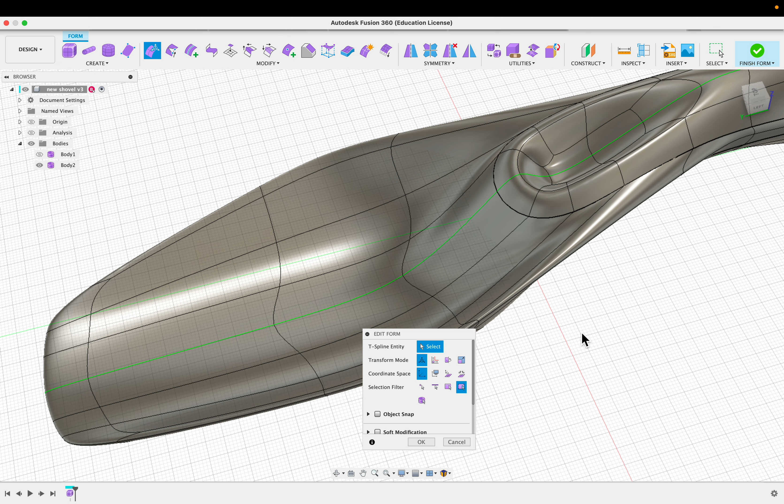We're doing a few more little modifications to our hand tool. So I've got my shovel, and I've done a couple things here. One thing I've found is that this edge, which I've creased, is a good splitting line between the handle and the shovel metal blade.

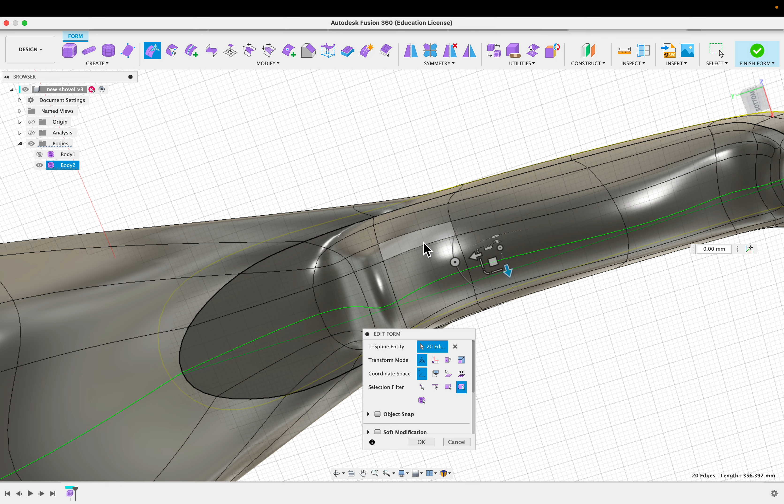And so I've actually built that into my model. I've also taken a couple of the single edges and used the bevel edge tool. I like to use 20%, which gives me two lines close together. It's a little hard to see here, but it gives you a bit of a crease. Let me change this to shaded.

You'll see that if I roll this around, you can kind of see there's a subtle edge here. It's not hard, it'll be good in your hand, but it's just giving a little more design definition. I was thinking about doing that on the top too, but I'm going to continue forward with this, 3D print it, and see if I like it before I bother with that.

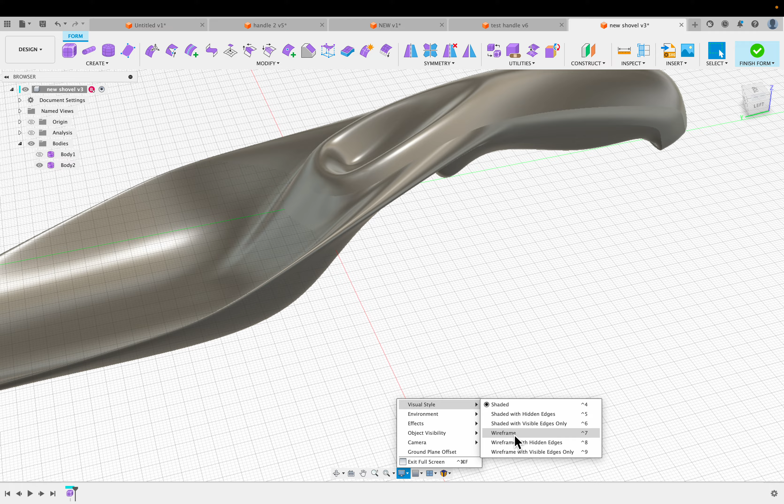So notice here I'm going to my— oops, let's cancel that. Visual style: Shaded will get rid of all those edges so you can kind of see what you have, but you can still edit. I'm going to go back to shaded with visible edges. Sometimes these things help and sometimes they get in the way.

So I've also put on a cross section here so I can make sure that my material thickness is relatively similar. It gets a little thicker towards the back. If I wanted to, now that I know this, I could just pull this edge in a little bit, and I do a lot of these very micro adjustments.

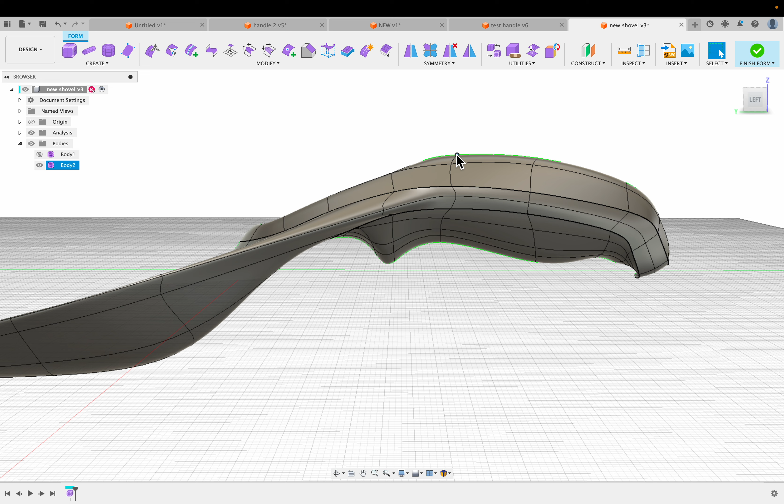I was mentioning I build the basic form in like 10 minutes and then spend hours on the subtlest little tweaks for design. Like here, I wanted this to be relatively straight and then kind of roll off the edge. So let's go to side view here, and you can see I've got a little bit of a curve rolling up. So I might go in here and do the subtlest little tweak. This is like hand sculpting.

Okay, so let's just say this is all good. Let's finish this so you can kind of see what my intention is. Turn off the analysis. And it looks like something weird happened here—let's see, I've got two bodies.

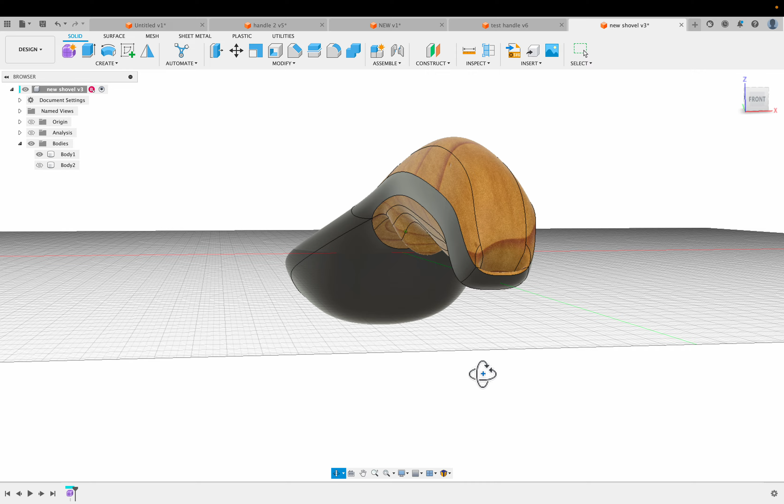There we go. So I've already used the material selection to have the handle and this integral shaft going through the whole handle. My idea is that this top and bottom are two halves that snap together, so you'll be able to have different handles, different materials, etc. I've also cut a little hole in here—this isn't quite right because this would all be metal, but I wanted a little loop so I could hook it onto things or tie a string around it.

So let's look at our materials real quick. Sorry, let's get back in here. I want to brand this, so I chose a kind of— let's look at this here. My idea is this is a recycled aluminum. I can change the— oops, that's the wrong one. It's this one, there we go.

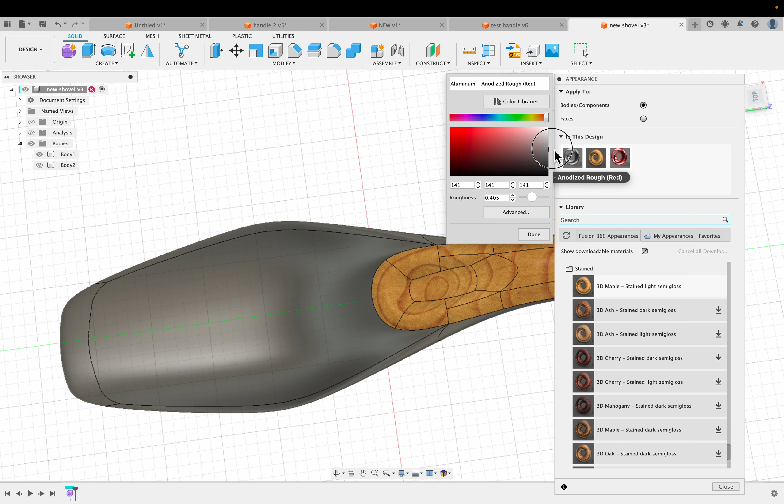I can go in and change the material color and stuff. I think I wanted something that was kind of a real aluminum, maybe just a tad blue. So I just usually bump it out a little bit.

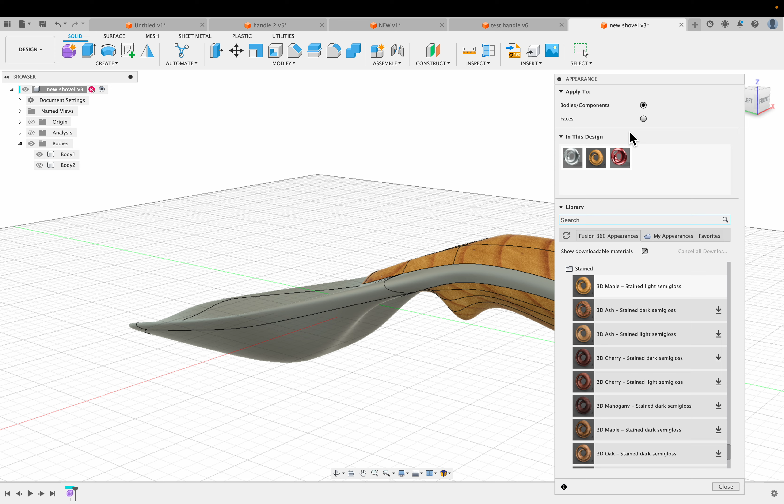Now that I've got this colored, I took the whole object and made it wood, then I colored it with the faces option and used my aluminum because there are fewer panels here. I have to kind of manually—I'll just show you. So when I'm on faces, I can color one panel at a time, whereas when I'm on bodies and components, this thing hasn't actually been split. I'm just doing some rendering, so I'm not bothering to split it yet.

So let's get a different material here. Let's go with a black plastic. Let's close all these—sometimes these get in the way. So I'm going to go plastic, scroll down to opaque and textured. And let's see.

So I've got random polka dots. I'm going to go with random. And now if I try to add this on here, I would end up having to redo all the panels.

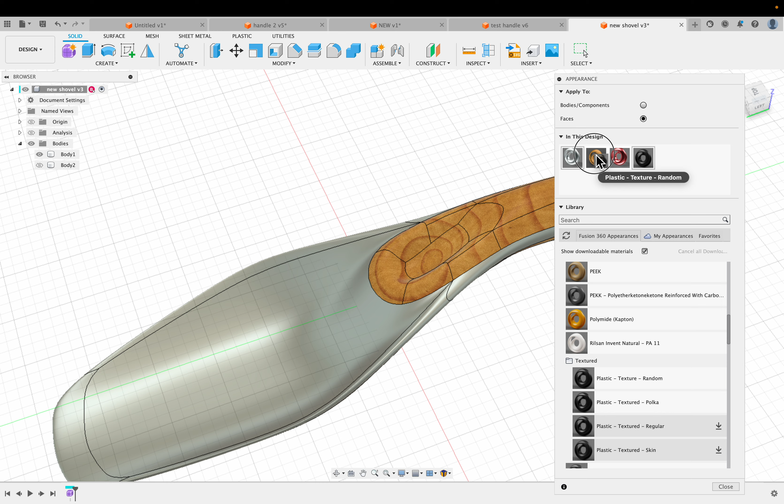So it's actually easier to bring this up into the window here, and then Option or Alt on Windows, drag. I'm holding down Option, dragging this on top of the color I want to change, and I could swap out that color.

Now, I don't know what the deal is, but recently some of these things look terrible in this view. You really have to go to render view, and again it'll look terrible, but when I render it, you'll see. So let's just hit render, and I'm going to do in-canvas render. And all of a sudden now it looks so much better.

I don't know what the story is there, but I'm going to zoom in here just for a minute and see what my random texture looks like. I want it real grippy because I'm working in the garden or whatever. So that might be good.

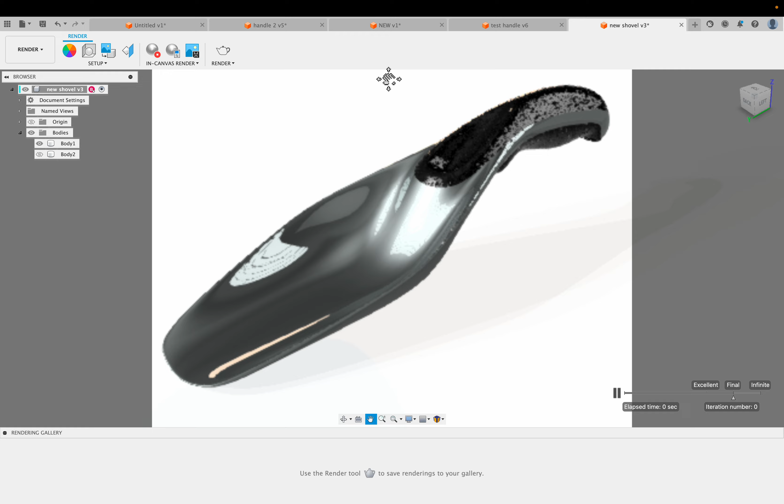So I'll let this res up for a second. And then I'm going to show two different ways to brand this: one decal and one emboss.

Let's do the decal first, because we're in the render environment, and that can only be applied in the render environment. I have to decide where I want to put it. I think I've settled maybe on somewhere on the blade here, even though that might get worn off.

Let's just see, so I'm going to go total top view. Actually it doesn't really matter, but I'm going to click on this little decal option here and go insert from my computer. I forget, I think I put it in here. Yeah, so I got my logo as a transparent PNG, so this is a good decal option.

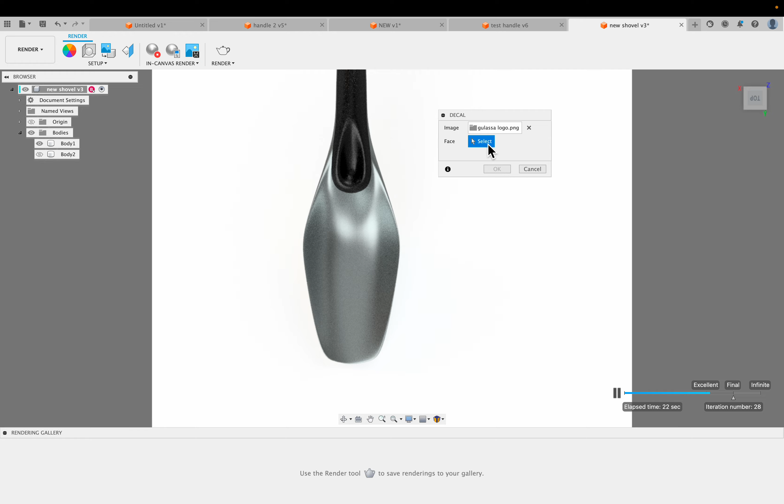So then it's going to ask me what face do I want to apply this to. This face here on the front, the big shovel blade - I've grabbed that, and I'm going to zoom in here a little bit.

Now I've got the typical options of scale on the edge here, so I could scale it up. I actually want to scale this down. We just recently did some stuff on stainless steel, and we laser etched the logo in, and that wouldn't allow me to have the white.

In fact, I'm going to turn off - so I'm rendering right now, I'm going to stop the render because it's kind of making things slow.

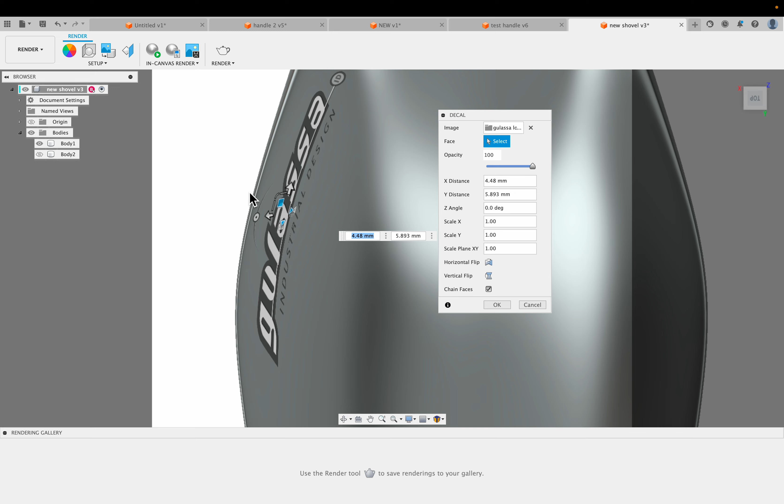So this will, it's kind of interesting, it'll conform to the shape. I'm just kind of rotating this a little bit here. It looks a little weird from this view, but I think when I rotate this around, it'll look nice.

So this is a decal. And let's get this in here and just get this rendering.

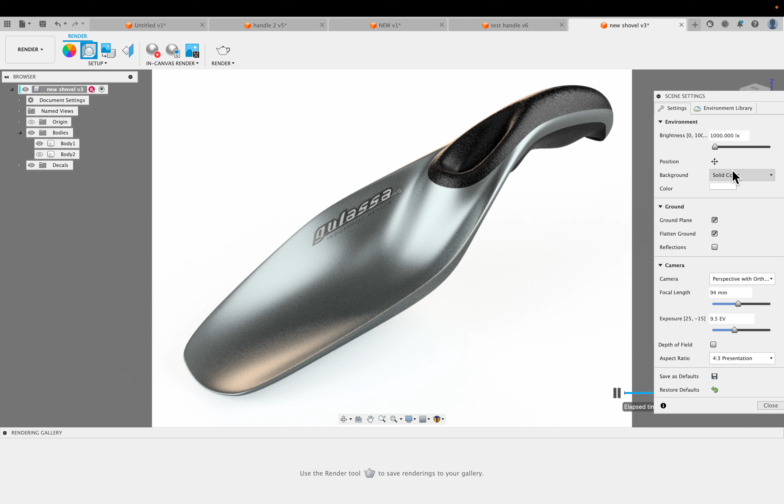I noticed that most of the time, I don't know why this is in Fusion, but the shadows start out looking okay, and then on white they just pretty much wash out and disappear. So either I'd like to choose a color background, slight gray, or even better yet, use the real background. Notice I've chosen scene settings here.

Instead of solid color, I'm going to choose environment. Then the shadows appear better, and the lighting actually looks a little bit more realistic because it matches the actual environment. You can see I've got these kind of nice highlights coming down here, which you didn't see on the white background.

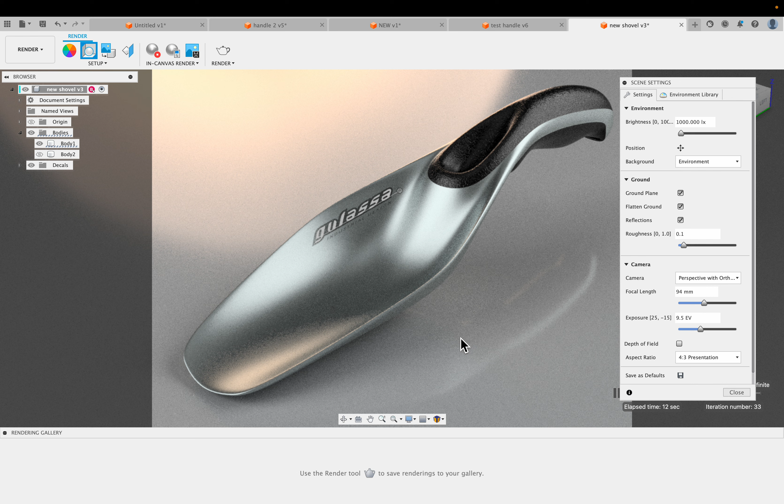And then I'm going to choose reflection. I like reflections because they also help tell the story of how the shape is in 3D, because it's giving you an opposite view of it from underneath, but a very subtle one. And it does read - I think people do kind of pick up on this.

So let's say I've got this going. Let me do one other thing. I'm going to move this scene settings out of the way by closing it.

So once this reses up, typically I have this just on excellent, that's good enough. I was doing some other stuff that needed higher resolution. The other thing is this rendering gallery - I can close this, which will give me a little more space.

I always render, not always, but typically on this aspect ratio of 4:3 presentation, because a lot of my clients put these in slideshows. And this is basically iPad screen ratio. So I've got that.

I could also go to viewport, which will render to your actual screen, and I can get it a little bit bigger that way. So if I'm showing this on my computer, I'll render it a little bit wider scale.

So I'm doing that. I'm going to leave most of these things default. This roughness is just something you can play with, it's the roughness of the ground. It only plays an effect if you've got the reflection on.

Yeah, everything else is pretty much standard stuff. I tend to like this warm light background, that's my kind of default. It's a little here right now, a little bit too much in the picture, but I like it when it's on the object. So I'll show you what I mean.

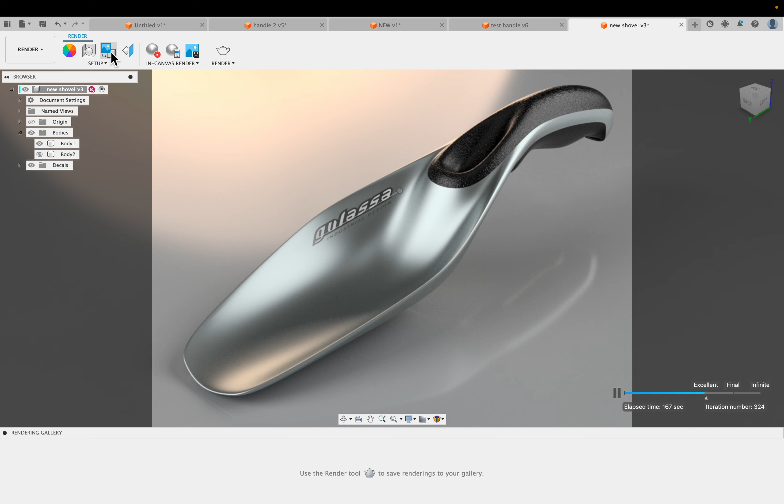Okay, so now I'm going to rotate this by going to the scene settings, and I'm still in render mode. You can do this while you're in render, it's just a little slower. But sometimes you kind of have to see where the shadows are going. So I'm going to rotate this and just get that hot spot on the background out of view. But I also want to look at the object itself and get some of that warm, cool.

And like here, you can see this is a different area. I've got the warm, I got the cool, but I also got kind of more reflection on the ground, so this is kind of nice. I've got this little highlight coming around here, this is helping define this little pocket here. So I'd say this is pretty good.

So I'm going to let this res up for a minute, and then I will save that one as well. In fact, you can let it res up, I'm going to just capture that image as is. Sometimes you don't need the full resolution. So here I am in the second one. A lot of times I just jam the keyboard for random letters, it just needs to be different. So this is 4-3, I'll say 4-3-1 and save that.

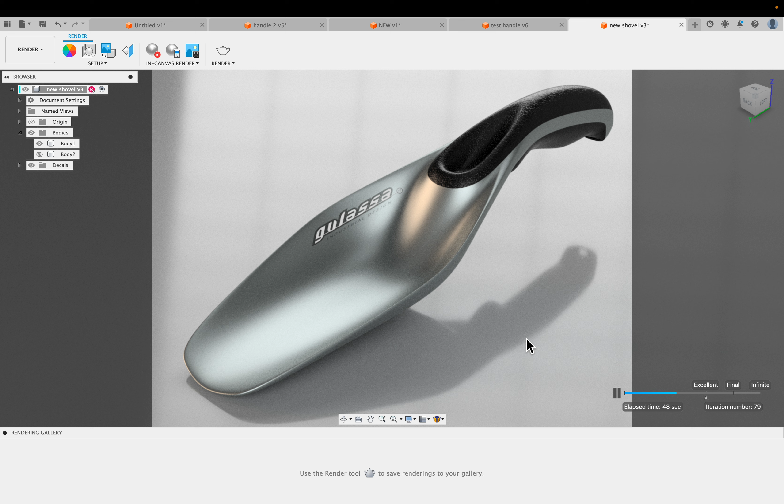All right, now there's another kind of rendering. So I'm going to stop this for a minute. This teapot render is a whole different world and a little confusing, but let's go through this because this is where we can get the animation. So I'm going to go in here and look at these settings. What I want to do is a local render, so that's going to render on my computer.

Cloud render will render on their servers, and it will cost you cloud credits. You have a certain amount as a student, it says here 16 per request, but we ran into some walls the other day with that. So I'm going to go back to my local render.

I'm going to choose this transparent background. What this will do is it'll render both on the background I have, but also give me a transparent PNG that I can overlay on things. So I'm going to do that. I'm going to leave the settings here to final.

And here you can see if I choose this, it just gives me more options, it's not really that big of a deal. And then this is going to render down, and you'll see it appear over here. So let's go transparent background, let's PNG. Everything looks good. And I'm going to do a turntable.

I could bump this up. So if I wanted a really high-end rendering for print media, making a poster or something, maybe I'd go higher, like 3,000 or something rather. That will take longer, so I'm just doing a test. So I'm going to go back to 1,000 as a good kind of medium-sized render.

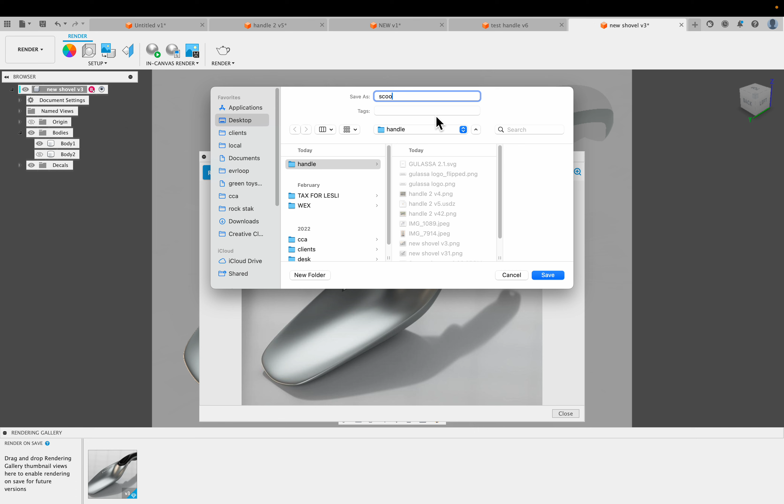So I'm clicking the download and notice the file name is, let's just call this Scoop. Scoop 2. Okay, so I'm in the right folder. I'm going to save that before I do anything else.

And then I'm going to turntable this. So I'm going to click on the little turntable icon. And then here you'll see this one is, it doesn't go to your computer. This has to go to the cloud. It doesn't give you an option.

6 frames is not enough. It's super jerky, so I usually go to 36 frames. And I've noticed about 1,000 pixels is 14 credits, and it says maximum is 16. So this is in the field. Watch if I just change this to 1200, now I've got 20 required credits and I've only got 16.

So 1000 is a good default starting place. I think I eked it out a little bit more to get up to 16, but this is fine. So 36 frames, final. I think if I click on standard, it goes down a little bit, but I actually want this to look nice, keeping my aspect ratio and everything all good, and then I'm going to hit render.

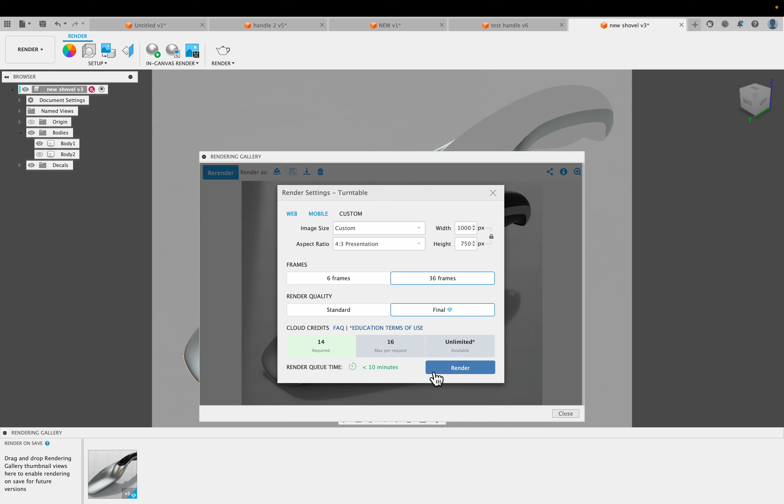And this is going to the cloud. So this little timer icon is going to count away. The nice thing about going to the cloud is that I can continue to work, and I'll come back here and look at this, and it should be finished by then.

So let's show another option of how to, this is a decal. Let's show how to actually emboss this into... while this is rendering up.

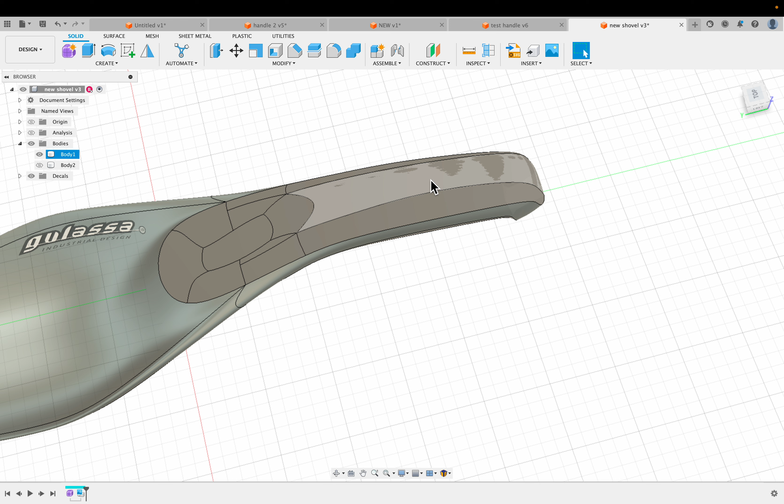So I'm going to go back to my design world, and maybe, I'm not really sure where I want to put this. Let's look at maybe right here. And I also tried one on the top of the handle, which is possible, but you might actually start feeling it when you're not wearing gloves. So I think it'll be less obtrusive right here, but it'll have to be smaller.

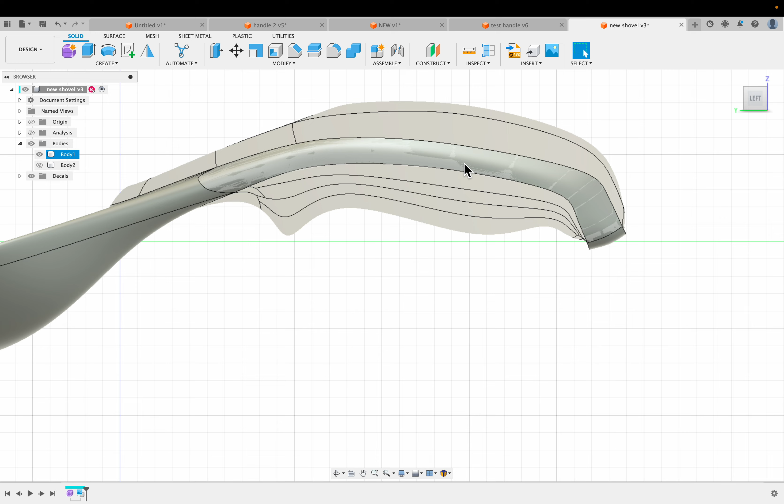And these are just Illustrator files I brought in. So that first one was a transparent PNG. This one I'm going to use an SVG, which is an export option. Let's go over to Illustrator just for a second.

I was playing with some different brands. I was thinking GeoForge and playing with different fonts and stuff. Let's just take one for a minute.

And what you would do is, I don't know if you actually have to outline the fonts, but I like to do that or create outlines, because a lot of times I might do a little bit of additional modifications, and I'm trying to find where, here it is here.

I don't know why I always like italics. You can see my logo is italic as well. And I could choose an italic version of this, but then I have a little more control over how italic this is. I might mess with this R and make it match the G a little bit more.

I might go in here, because once you've got outlines, I can do things like grabbing individual edges and messing around. And this isn't so much about creating a logo, but just showing you.

Okay, so let's say that's my thing, and this little edge looks way too sharp and scary, but let's pull this out just a teeny bit. I want to do something over here. Maybe this is going to come down. Oops. And here I might need just to kind of create some balance between these two.

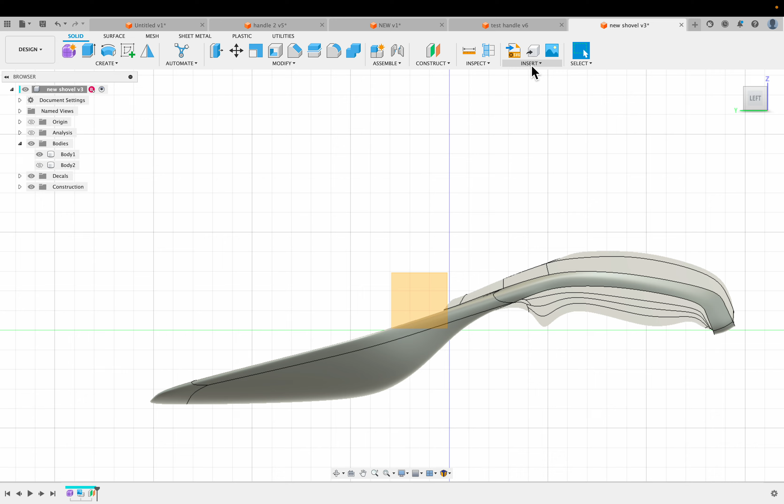Instead of starting a sketch, I'm going to insert an SVG. Let's go insert from my computer, go to my desktop. I've got my handle that I'm working on. I saved that other one, but I'm going to use this, my other logo.

Same process, this is an SVG. I'm going to open it and place it on this plane, and you should see it somewhere. Sometimes you have to scale way down because SVGs are really weird - they don't line up like you think they would, and a lot of times they come in backwards.

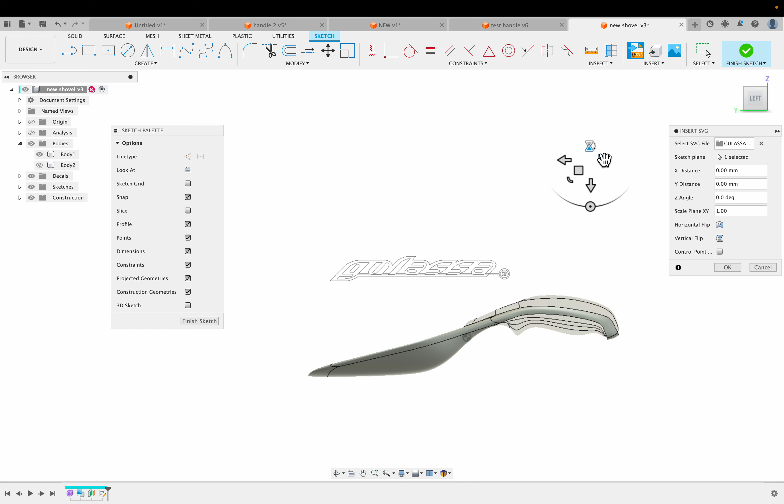In this case, this is flipped, so I'm going to use this little flip icon to flip it back. This is the scale icon, and this is a little bit frustrating because this is my center point, and I've got to grab that.

It would be nice if you could reset that center point, and maybe there is a way to do this, but a lot of times that can be way off center and make it really difficult.

I might even go in and create a font that has a curve to it to match this curve, but I'm just going to use what I have. Notice also I'm rotating this and it's kind of jumping, so I'll look at the angle here. If I want just a teeny bit of rotation, I'll see what it snaps to. This is minus 2.3, so maybe I just want to try minus 1 degree. Nope, not quite 2. Okay, let's just go with that.

So I'm going to move this down. Let's move it more central, right there. Okay.

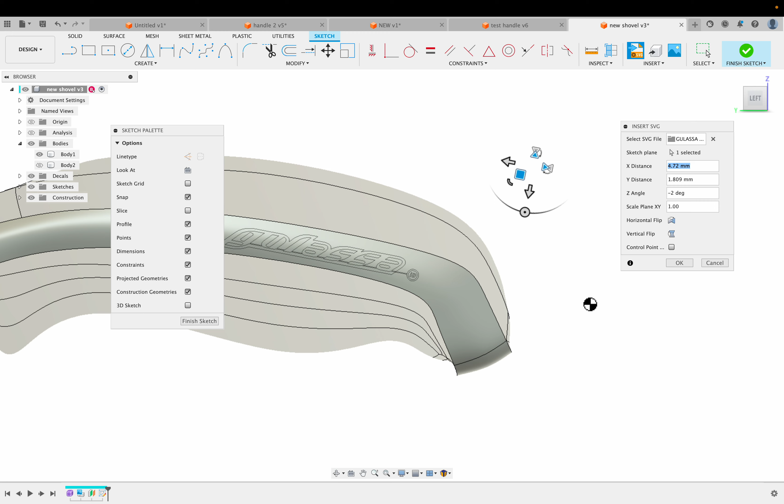This should behave just like a sketch does, and it's green. When you import the SVG, it is a sketch, but it's locked. Once I set go, it's locked. So as soon as I finish this sketch, I won't be able to do anything.

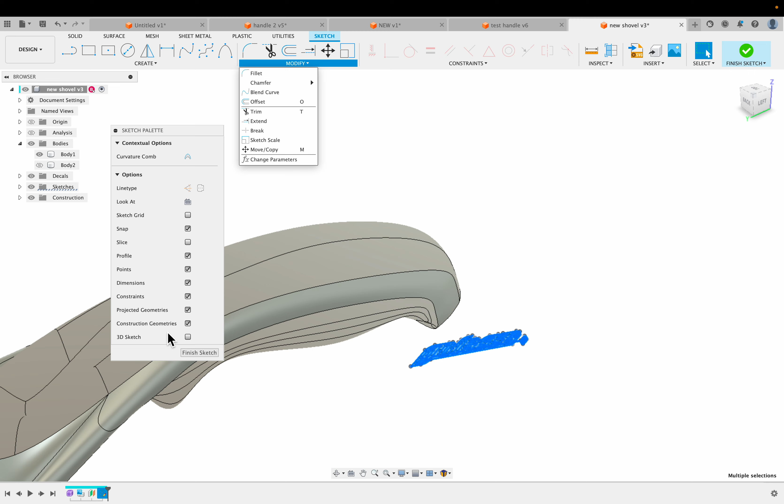But I can go in here - I can't really move it or anything, but if I go in here and use the... somewhere there's an unlock feature. Where is this? Okay, I don't know where that is. So let's just re-import and set up if I don't have it quite right.

Okay, so now I'm going to emboss it, but I want to use this surface. This is really important - you can't just emboss and cut into this like with this tool, with the extrude tool. I'm going to have to grab a few more pieces, but I'm going to show you what I mean.

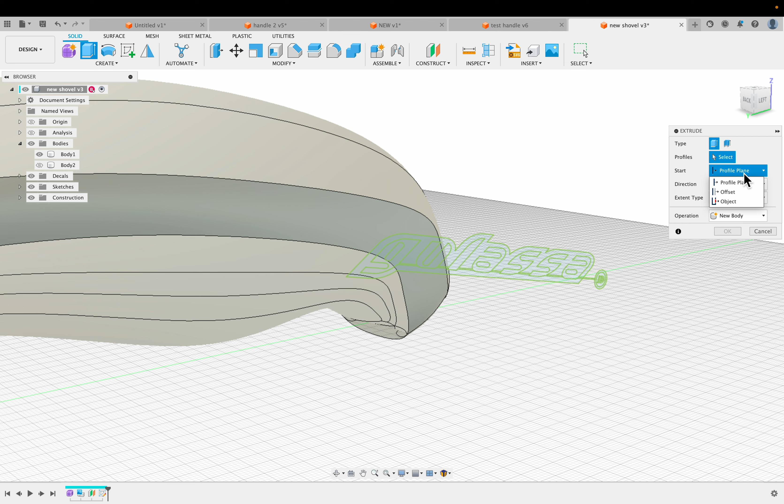If I grab this piece and just push it through, it will cut into there, but it's not following the curve properly. So they have this amazing feature which I use all the time - instead of starting at this profile plane, which I'm doing, I'm going to start from the object, which is this thing.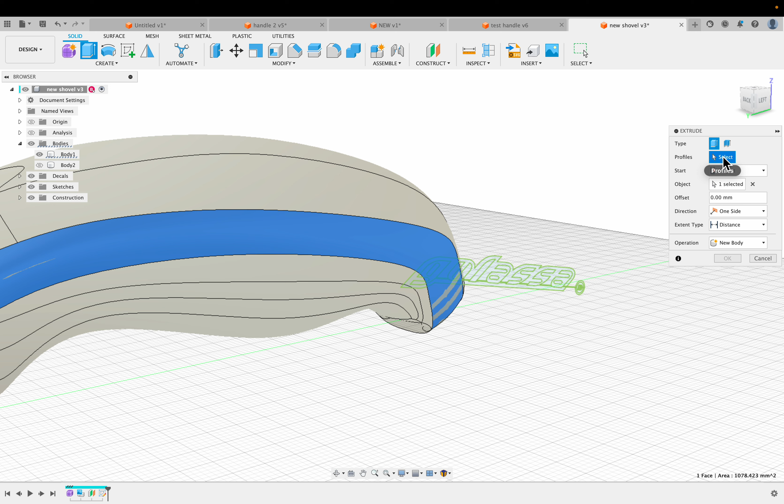So I've selected that - object is selected. My offset amount, let's see, wait - oh, I've got to select my profile. So there's something missing here. The profile, in this case, I'm just going to select the gulassa letters, and those are actually connected, so it makes it a little bit easier.

You'll see my arrow there, and I can actually push this in, and it will cut into the surface and follow the curve. Or I could pull it out.

This should be in distance. Check and see if it's a positive or negative number. If I change this to a negative number, in this case, it will pop out of the surface. And I've got join, so it's going to add this to this surface.

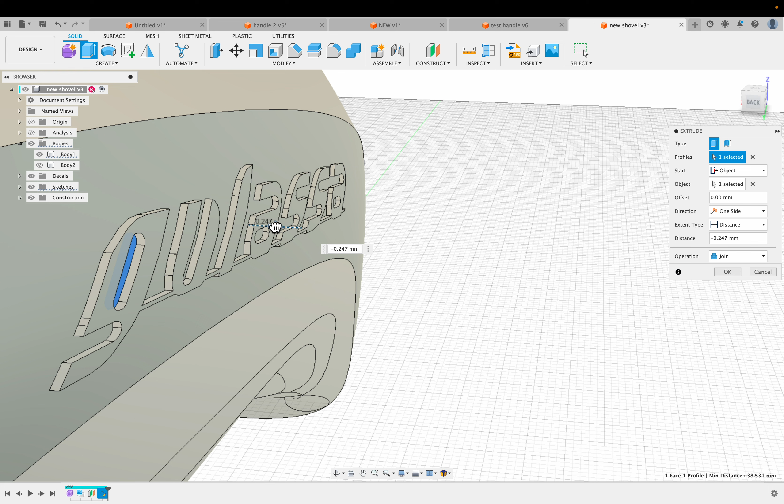If I zoom way in, I can get a little more control. I found that you don't want to emboss this too much, so like 0.25 millimeters in or out is enough. Probably maximum would be 0.5.

So there it is sticking out, which could be nice, but like I said, it might be a little bit more. I'm just going to go 0.25 in. Like I said, if it's going the opposite way you think, just change the positive or negative. Okay, so that should cut into the surface.

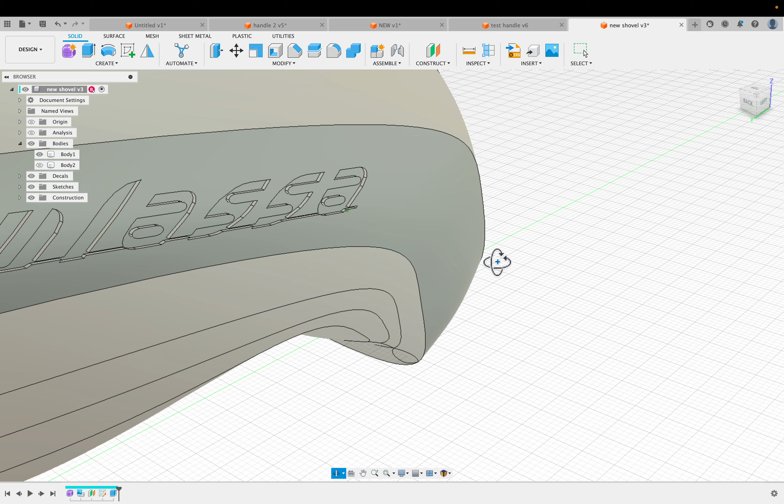Spinning beach balls are never a good sign, but it worked. So if you ever see a spinning beach ball and it finishes, save immediately because you might crash it right after that. Okay, so this

Could be done, but if I wanted to throw some color in there, what I would do is go in here and choose my appearance. Let's just use this—actually I'm going to use an opaque plastic, or paint actually.

Sometimes you can rub paint into these and then wipe off the excess. So I'm just going to go with a glossy paint, pick a color. One nice thing is that I don't want red, but I can go ahead and do this and then change this material and it'll update.

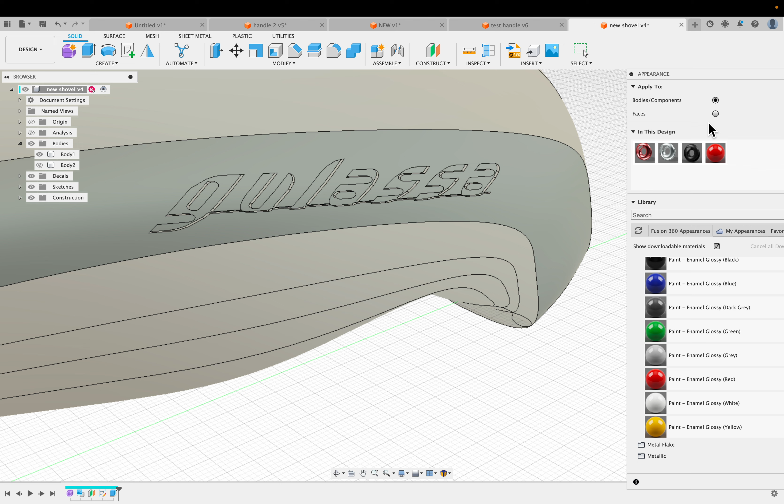Now I'm going to use faces, and I think this should all be one face, which is really nice because I've got this little connector line. And then you'll see that now I can double click on this, and I like orange colors better than red colors, but not too yellowy. It's got to be dark.

All right, so let's take a look at that. Render. Get the whole thing in here. Whoops, and scoot this up a little bit. And here I'm seeing my sketch in the render world, but it won't render actually, so I'm going to turn that off just to not bother me.

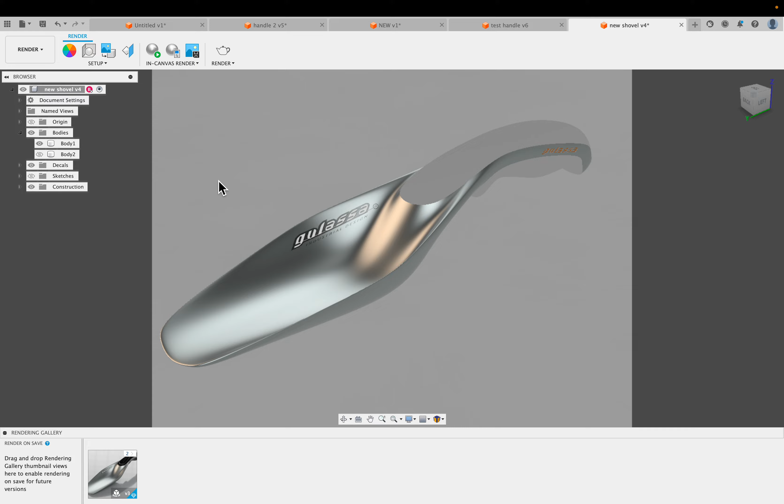Let's take a quick look—you can see now I've got two options, either a kind of decal version or an embossed version. It might be better in the end to do something like this because this is the active surface and it'll get rubbed off. The nice thing is I could just turn off that decal just by clicking this.

All right, now that I'm in the render environment, I'm also seeing that my turntable's done. If I double click on this, I should be able to see my turntable. Notice the edges are going out of the frame. If I didn't want that to happen, I'd just shrink it down slightly before I rendered it, or do a bigger viewport, bigger ratio on my screen. So let's do that real quick.

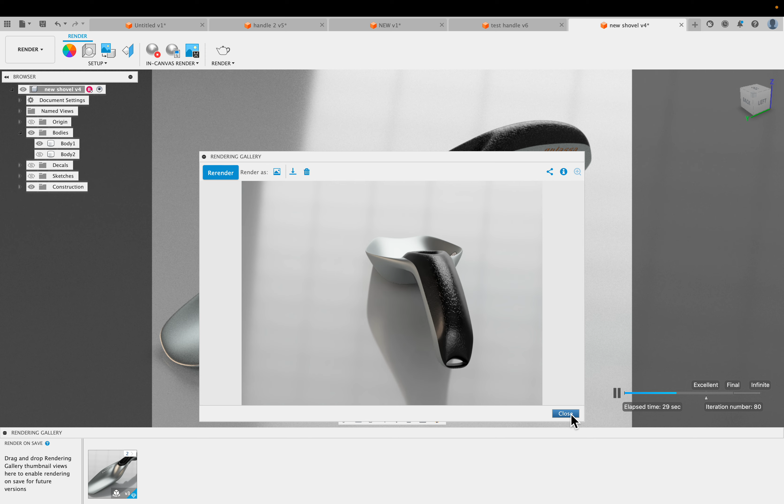One other nice thing is if I set up my presentation—let's go back to our settings for a minute. I mentioned that the environment looks better, but if I go to the

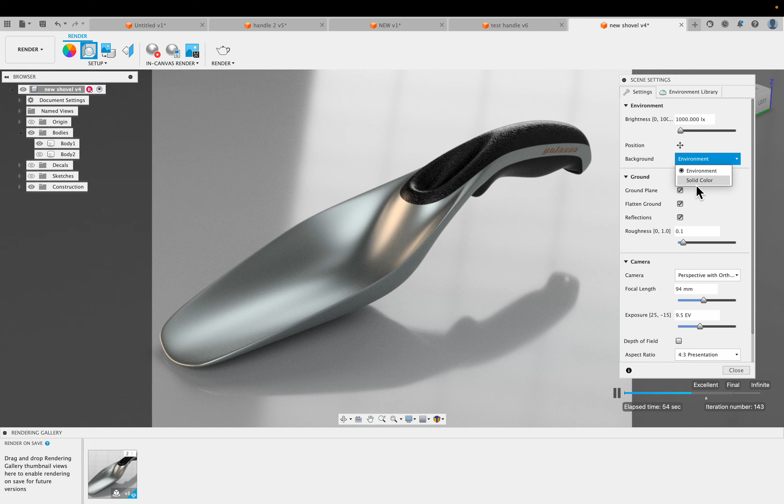Background and choose a solid color, but not white, something different. So in my presentation, I might set up my background colors to something very specific. Let's just do a kind of gray blue for a minute. I'll apply that, see what that looks like.

Notice that I've got some numbers here—this is RGB. So I could actually set up my presentation with the exact same colors, or vice versa. If I know what color my background is in my presentation, I can change these numbers to match. This looks a little—let's see, I want a little less purpley, maybe a little more gray. And you'll notice again the reflections show up on the color background.

I'm going to do one more thing. I don't know if this will work. I'm going to choose the depth of field—you'll notice everything kind of starts getting fuzzy. I'm going to choose my center focus somewhere in here. The front and back are too fuzzy, so I'm going to turn this way down so it's more subtle. This number is super arbitrary—it depends, sometimes it's going to be like 0.001 or something.

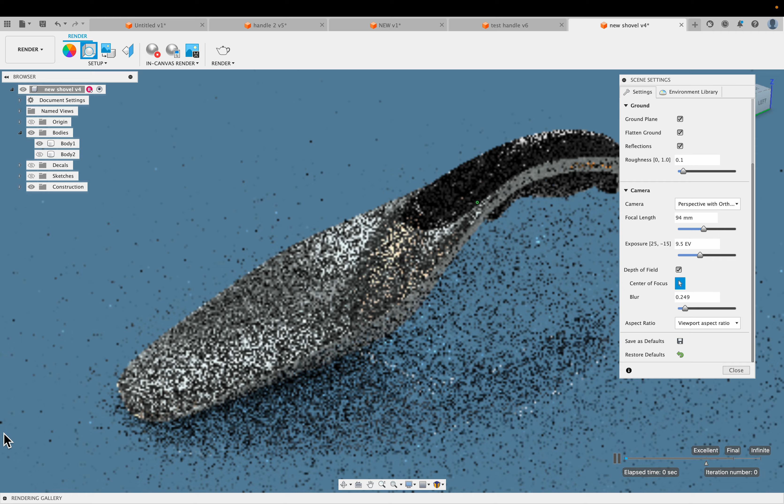And then I'm going to change my aspect ratio to the viewport. I'm going to close my rendering gallery, which will give me a little bit more space to deal with and a higher resolution. Let's go ahead and render this in the teapot world.

Custom PNG, transparent background, local render. I'm going to change this — even though this ratio relates to exactly how many pixels are here, I'm going to change it just to make this go faster, down to 1,000 again.

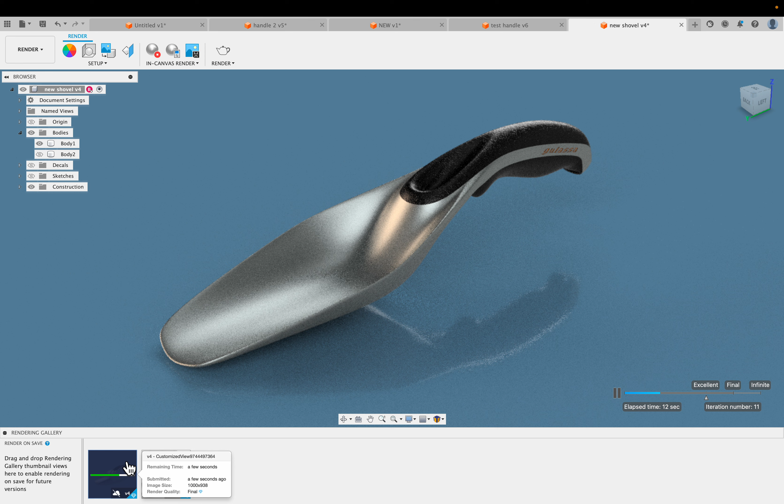I'm going to hit render. This is a local render. Now I can go back and open this up, and there's the second render. It hasn't actually started, you don't see the bar going — oh sorry, it's this one. There's the bar going. As soon as that's finished, we can set up the turntable and go back and do some other modifications.

It's almost done, following the bars. Okay, let's open that up. So there it is, we got plenty of space around.

Let's set up the turntable now, and we'll do again 1,000 by, we go back to 36 frames. Now notice this — let's go to standard, let's see what the difference is. It says only 9 required with the standard resolution, but I want 36 frames because I want that nice smooth result. I think because my relationship is slightly different, it changed it a little bit, but let's just go ahead and hit render.

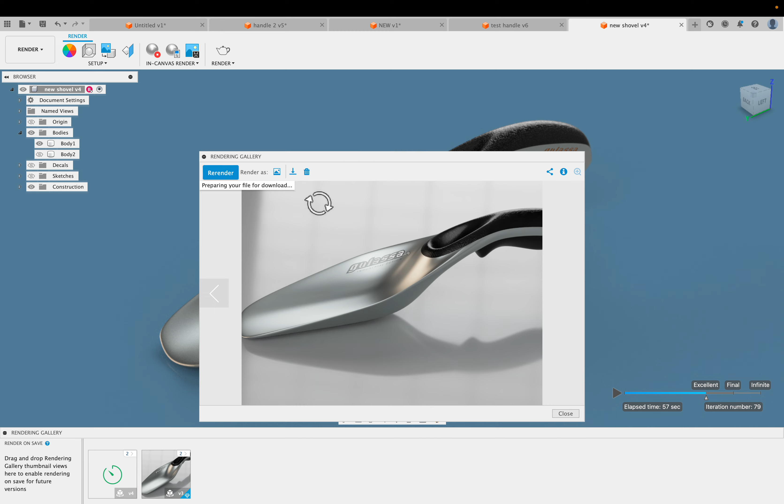Submitting to the cloud, and that's firing up over there. I'm going to close this. I'm going to go open this one again and just save it before I lose it. So use the little download as a video, and notice you had some different options there.

And I found that new shovel, yeah, whatever. Okay, so handle, it's all good.

I've been doing a lot more of these turntable things because I think for my clients it really helps them understand the three-dimensional shape of the object. Okay, so that's going. Let's see, what else do we want to do?

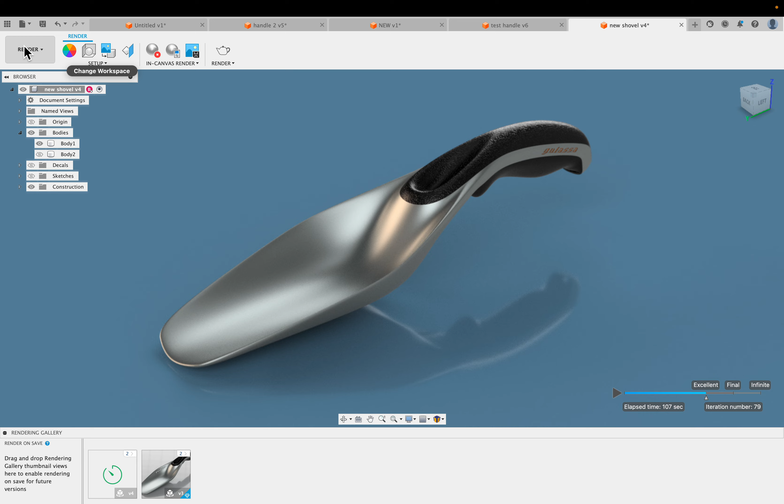Oh, I talked about custom material a little bit. Let's go back into our appearance. And I've got this one, which is kind of interesting. It's got a bump texture to it, the plastic texture, but I'm going to find something that's a little more — I think the layout of this thing is really poorly set up, and sometimes even just opening folders can be difficult.

So I want a fabric. I'm going to use a leather just because I know that one works. I'm going to click on leather, and it kind of doesn't matter which one — let's pick a leather here. I'm going to bring this up, and I'm not going to apply it yet, but I'm going to open it up.

It's got some settings I can mess with here, but I'm going to click on advanced, and here is the texture — it's an image. I'm going to click on this, and here's the image, and I'm going to go to where it says source and click on that. I thought I downloaded an image, but I don't see it in there.

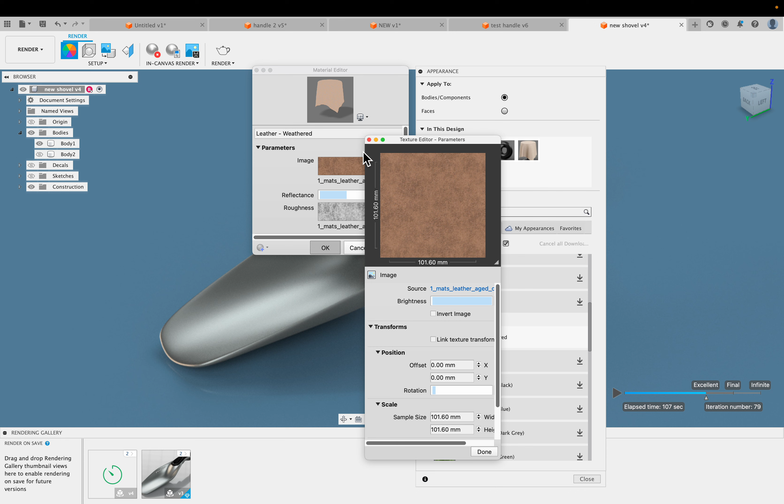All right, I'm going to have to go get that image again, but I can replace that image. Part of the problem though is that these kinds of things tile really nicely, so they made sure there's a repeat edge to them. I think I'm going to do that in a whole separate thing, but basically you can replace this with another image, and if it's big enough, you can mess with it so it lines up.

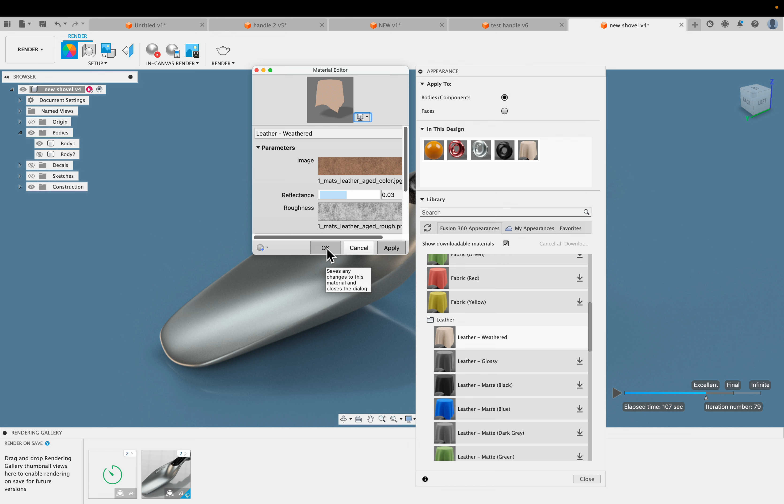So it's got an image and a roughness map, and they're based off the same thing. You can kind of see this is black and white, a little more high contrast, and that will create the bumps and stuff. I'm just going to use this as is for a minute to show you how to set that.

Just to mess with that, but I'm going to use a different leather. Let's try — actually, perforated might be kind of interesting.

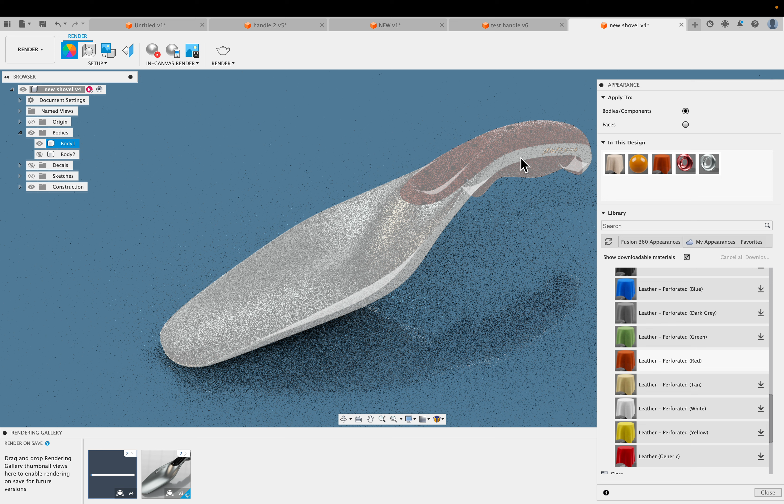Okay, so notice I click on the download arrow just to make sure it's in my local folder. And then here's where I've got this already all mapped out. Instead of trying to go in here and say faces and reface everything, I'm just going to hold down Option or Alt and drag it on top of the black one, which is my texture, and that should swap one for the other.

So you can see there's some holes in the leather, but in my leather texture, if I let this resolve up a little bit, sometimes it's not mapping the way I want. There's a bunch of different mapping options, and I can also see my fuzziness is maybe too much, so I'm going to go back first, open up the leather, and I want these polka dots to be way smaller, so I'm going to scale this way down.

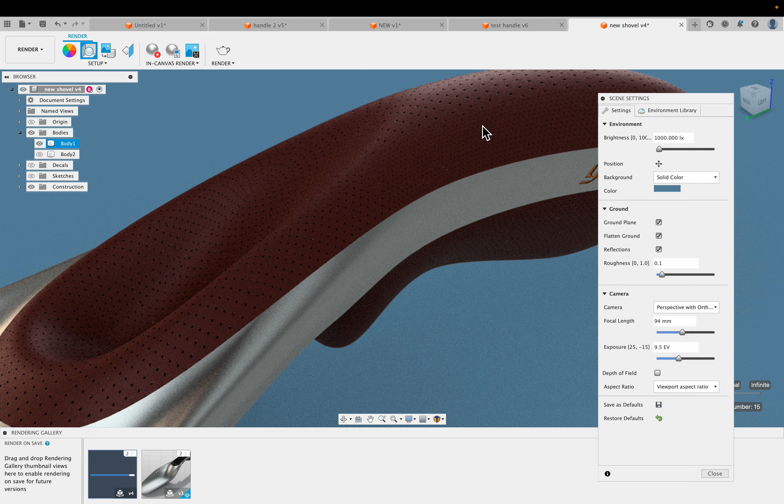I'm going to turn off the render and turn off the depth of field. You'll notice that the scale is kind of weird, but it renders quick. So this is probably something closer, but look at these holes on the top are big, and then these ones on the side are kind of random.

So what we want to do is use the texture map controls, which is this weird icon. For the selection, I'm going to select the whole object because it's really two colors applied to the same thing, but the metal doesn't matter, so I'm just going to say all right, this whole thing. I've noticed that box mode is the most accurate, so watch when this reses up. Now you can see the holes are all pretty much uniform size.

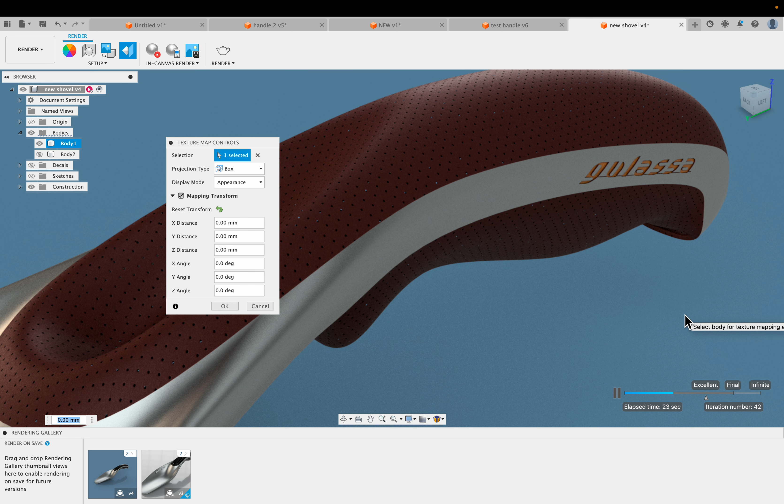There will be a stitching difference, and you can kind of see if you look really closely right along here. Think of a box projecting sideways, top down, front and back—there's going to be some kind of stitching areas. So this isn't perfect, but you'll see if I choose other modes, they'll even be worse.

So let's try cylindrical. Here's my object, and it says axis. If I click on that, usually it will highlight... I need to turn on my origin. Where's my origin? I might be way off, oh, there it is. Okay, so let's say this is the axis for cylindrical.

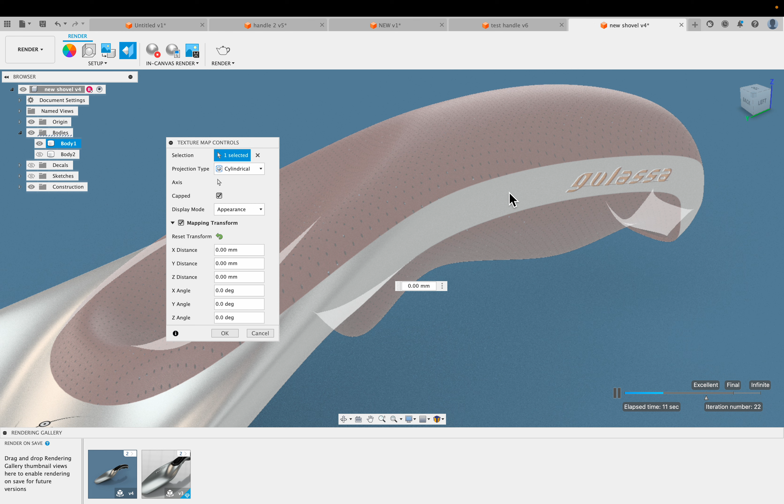I can't really see it until I render it, and I might have a setting off because that used to not be that way. You'll see that those holes get stretched in weird ways. Up here it's tighter, and over here it starts stretching as it wraps around the corner. So play with these and see which one you like the best.

I'm going to go back to box mode. Is this the right one? Yeah. And so that's texture map controls.

And a lot of the different materials that have imagery-based stuff, you'll need to go into this texture mapping to set it up properly, or else you'll see a kind of patchwork, weird kind of look.

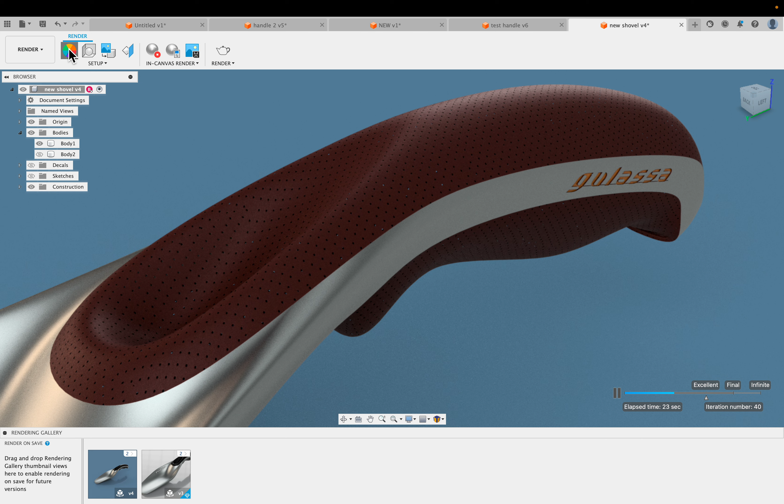Now also notice that if I go back into that material, which is leather perforated, I can change the scale, but I can't change the color because there's no color option—it's baked into that image. So I could open that image, find this, and change the colors in Photoshop or something, but you don't have as much control over some of these things.

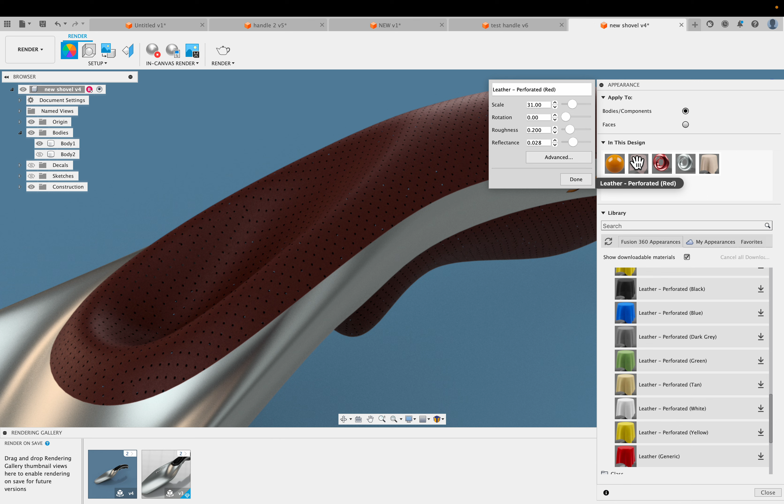But I do want—oops, cancel that. I do want to, I think I went a little too small at 31, and I want to go up a little bit. Look at that, so I'm 31 to 43 and then they're huge. And if I go down to, let's say, 25 or something, I think that would be half—they'll be super tiny. So you just have to watch visually what's happening.

30, it looks good. Okay. And then you'll notice that they're actually hollow, so I'm looking through where some dots are lining up with the other side. So it may be a little weird.

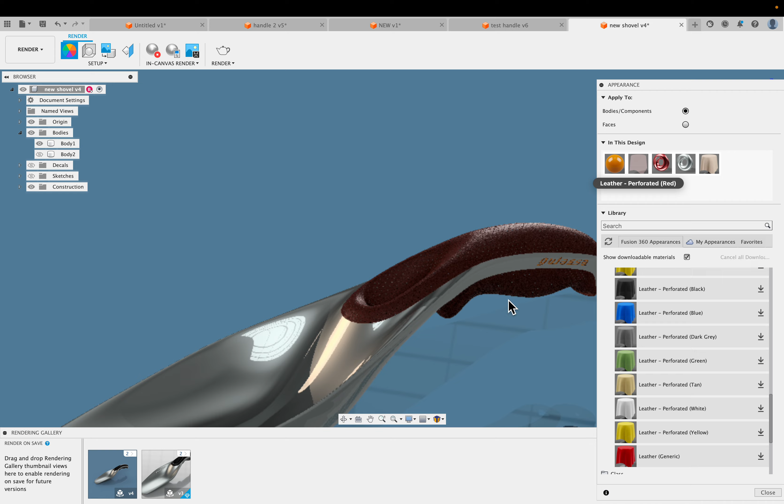So let's get this up in here. And theoretically, I could have this with a leather where that's sandwiched in between two halves, kind of trapped and stretched over that handle—so it's not completely unrealistic. Let's let that res up a little bit.

The other thing is, even when I do metals, I typically have a little bit of roughness, even if I wanted it super shiny. This is the roughness here. So if I go to super shiny, you'll see it actually gets distracting with all the environment reflections. Just putting a little bit of roughness will help dissolve that into a softer focus kind of thing. So this is less than I had.

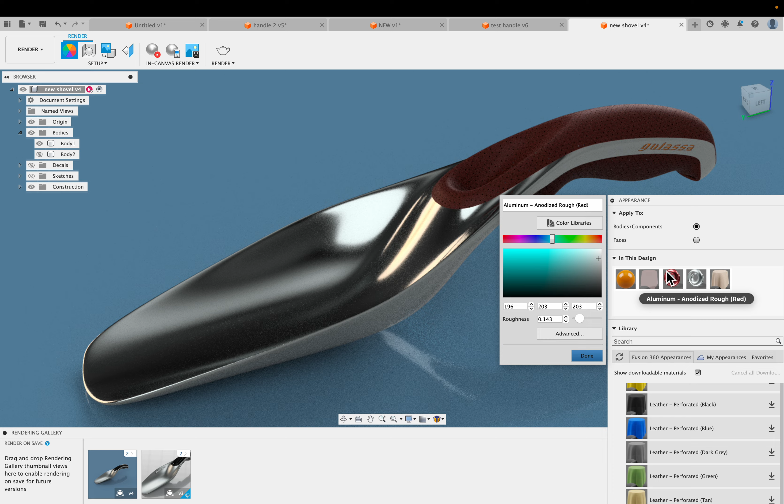And then lastly, let's go outside and see, because this is an outdoor tool, so let's see what this looks like in an outdoor environment. I'm going to go back to my scene settings, go over to environment library, and choose the dry lake bed, but keep the background blue. The dry lake bed has really nice kind of chrome sky, if you will, where it looks like you'd expect chrome to look. I'm going to leave it on this blue background, and this particular built-in environment has kind of harsh shadows, but that could be a good thing.

This one's a little softer shadows and more kind of cloudy sky, so you get a little bit more shapes in here. The plaza, these are all just the defaults.

This one's like a lower sun angle, and you'll notice that the shadow is also softer. I'm getting a little bit more reflection. So play with these. The snowfield has very soft shadows, and you'll see the chrome is kind of washed out, more gray.

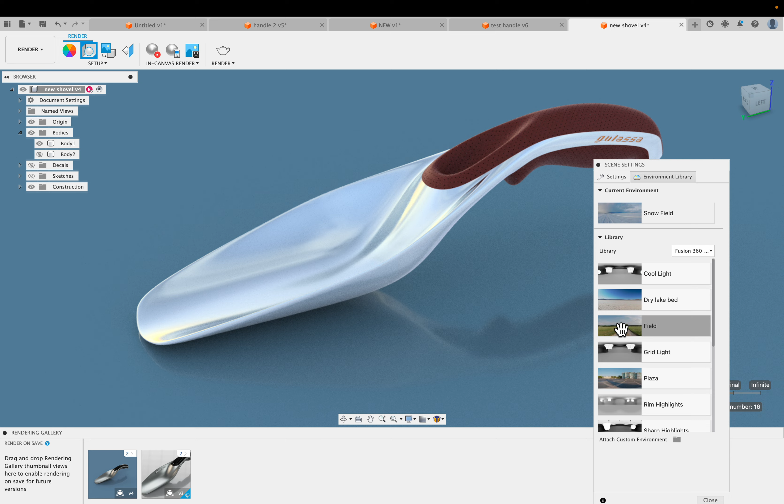It looks a little not quite right for what we're doing, so I think either the field or the dry lake bed. Let me go back to this one because it's nice, harsh lighting. And you can also change the brightness of the environment and the exposure, which are kind of two different things.

I'm going to change exposure up just a little bit. Dink. Or am I going the right way? Oh, sorry, I'm on focal length. I grabbed the wrong one. Here it is, exposure. So you can see that lightens up that chrome, so play with those.

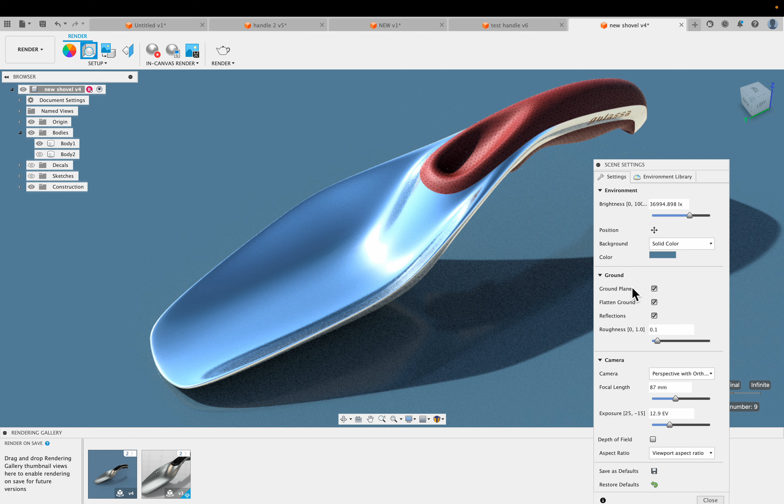Also the shadow, maybe is not where I want it to be. Let's get a good angle here. I'm going to look at that little divot to make sure I got some highlight and shadow in there, but I can click on the position, move this out of the way, and if you'll watch the shadow go around and also watch the highlights on the object.

When I get to here, this is exactly the same place as over here, so I'm just continuing. So here the shadow is kind of weird. Over there, maybe, somewhere, actually this wasn't terrible. And then I'm looking, like I said, to make sure that my object form is best shown and highlighted in there. And so I'm going to close these. This is good. I like this.

And so you can either use the teapot thing or you can just let this render up. And like I said, when it gets to excellent, I can go ahead and hit save.

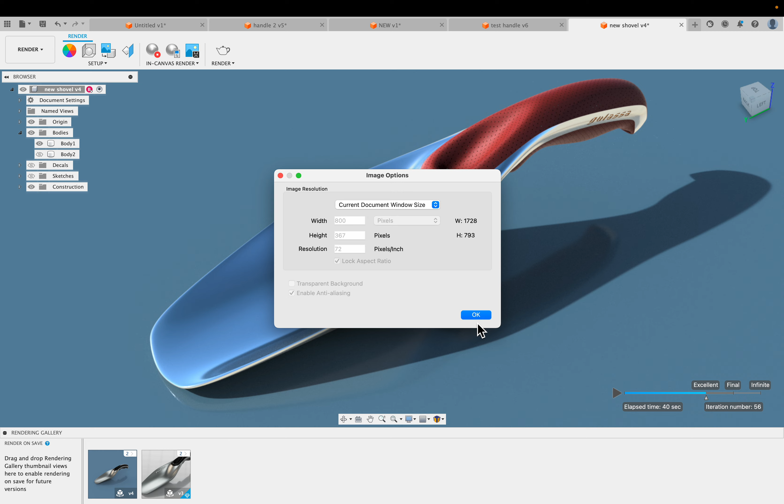And there we go. So I'm going to capture this image. Current. That first window, there doesn't even give you a choice. So, okay, here I want to give this a new name as well. So maybe this is leather.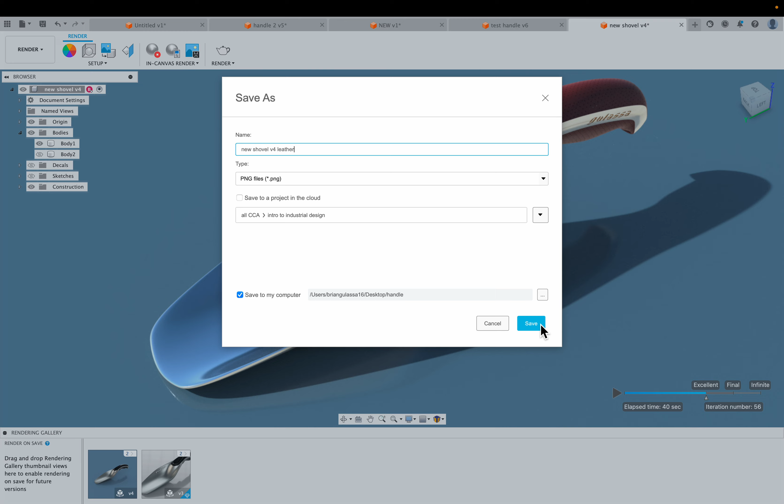And I'm going to do this as a PNG. Doesn't actually, at this point it doesn't matter. It's a JPEG or a PNG or whatever. Let's save that. And there you go. I'm going to stop here.

I do have a couple other things, but I think I'm going to do this in a separate video, just so this doesn't get too long. Also, I might want to do a render of this kind of back end and show off this opening here.

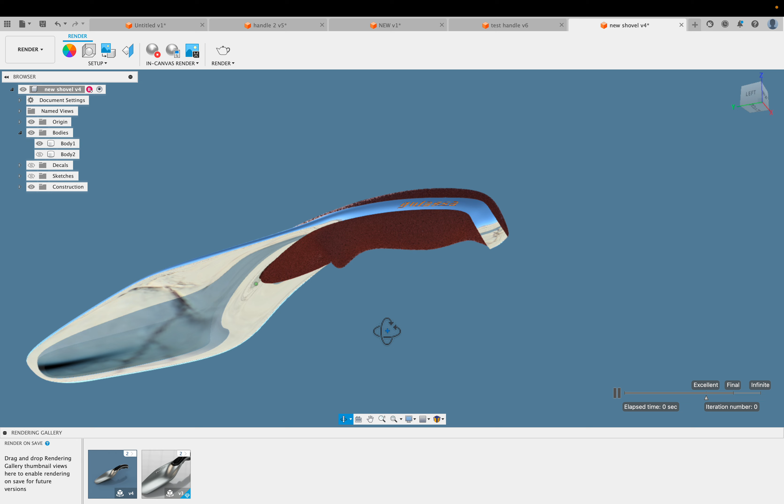And I noticed, now that I think about it, one of my students noticed when I'm rotating this around, I'm getting reflections of the ground on my object, but here this is kind of a weird view because I'm underneath it looking up, but yet there's a reflection of the shadow. So this is an artificial view that I can't really get.

So one thing you can do, if I turn this around, I can see that I've got this facing upward because this is the top view. If I turn it to the top view and right click on that, oh, maybe I can't do it here. I think I have to do it in design. Right click on the top view. One more time. There we go.

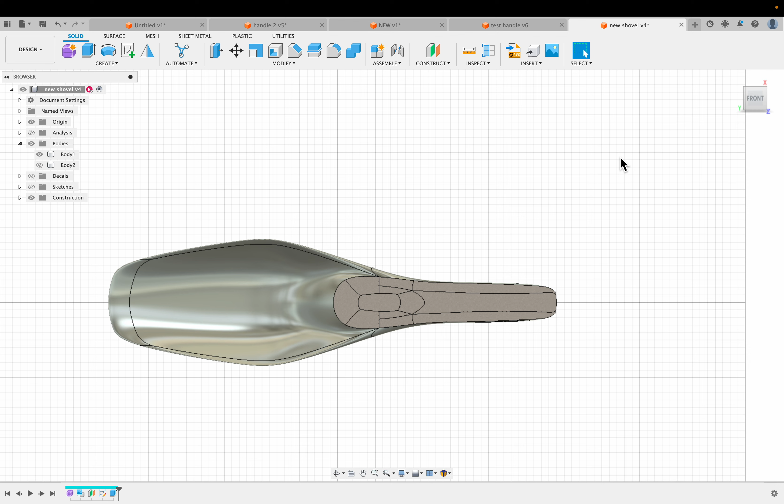I can set this current view as front or top. Where's it on? So let's try front for a minute. Or actually, sorry, let me do this again.

Oops, I guess I can't undo that. Actually, what I want to do is grab the bottom view, wherever it is. You can rotate it around and then right click on that and set that view as the top. And then watch the lighting change.

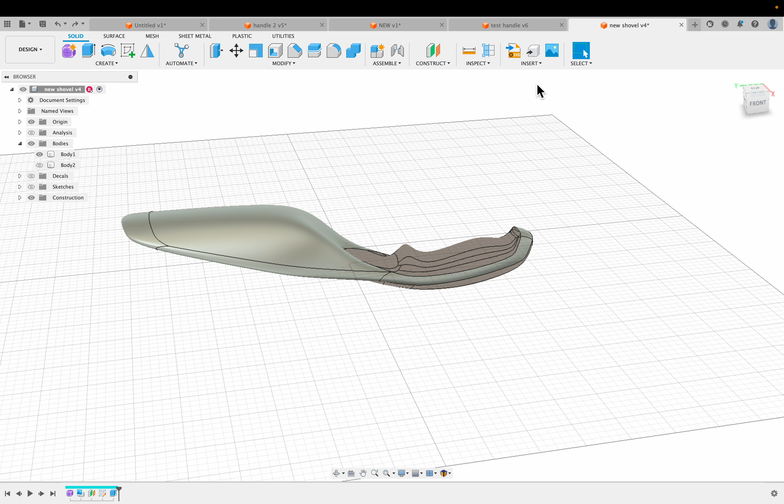And so now if I render this, this will look like it's kind of upside down. And the shadow will be over here. Now this is kind of an unrealistic view because you'd never have this shovel in this view. So what I'd like to do is, if I'm rendering these things up, I'll look at the grid here and grab the whole thing and try to put it in a position that it actually would be naturally in.

And here, let's do this. I did this in class. I'm going to make a duplicate of this by copying and pasting this copy. And I'm not sure if this is going to work, but let's try this one. We're going to flip over. Oh, good. Yeah, it's going to do it. Oops, I grabbed the wrong one.

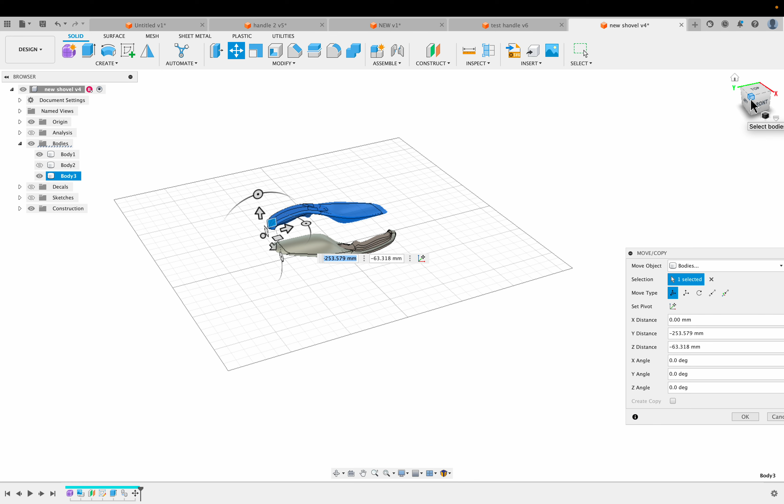Here's where I really need to look at the side view, because I want these both to be sitting in the same world. I'll take a bigger line and say, if this was really an object sitting in space, the handle would touch, and then the bucket would touch. So there and there, that's pretty close. This is -63, and like I said, it jumps.

Let's just change this to -1, see if that does it. Closer. Tab. Nope, now I gotta go. It looks like it doesn't. So there's 0, and there's negative. Let's try that again. 1. Just hit return, that's probably close enough.

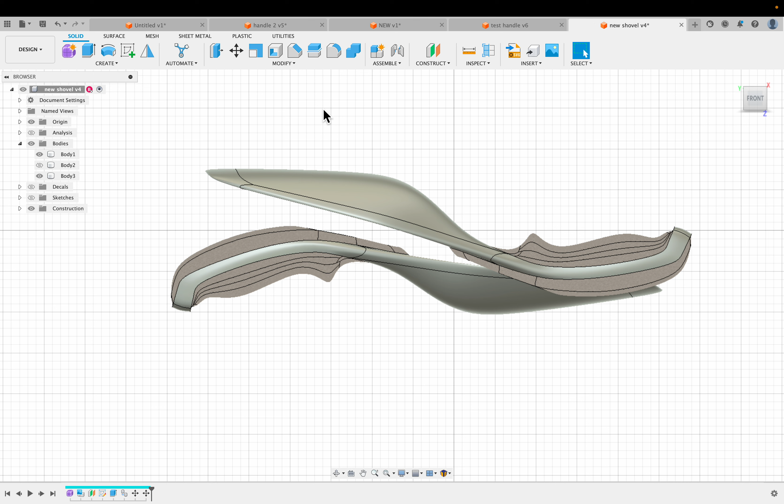So I'm using this line. Now this other one that's upside down, I'm going to grab that and rotate it around. Sometimes I just do them in opposite directions, and that's enough to give you a more 3D sense. Okay, so that's that. Rotate this up.

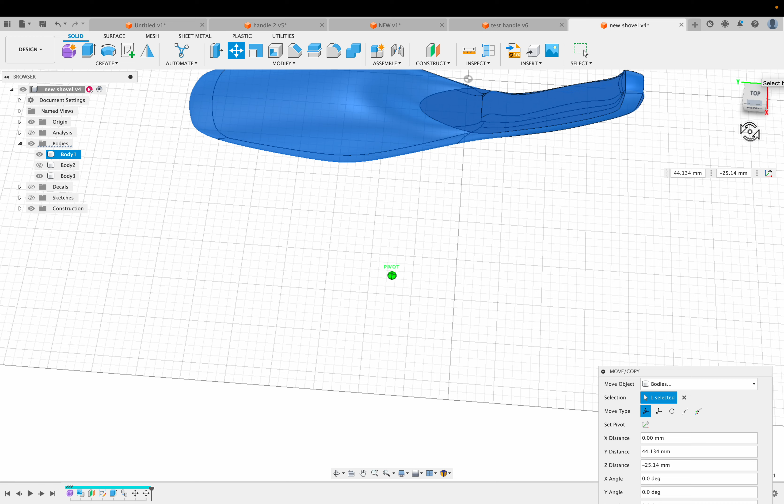Top view, they're separated. And the funny thing is, a lot of times by the time you render this up, I might move this one forward to fill the square a little bit better. But notice that forward is not this anymore. So let's do this.

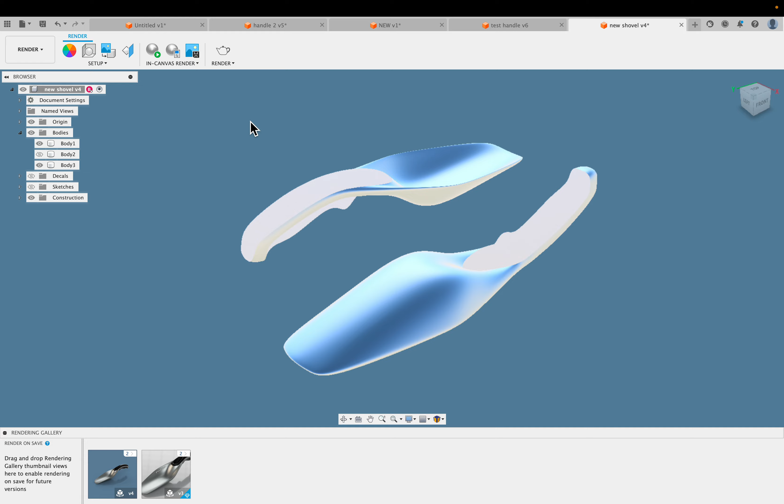Over a little bit this way. So they're not lined up perfectly, but I'm going to okay that. And then when I render them up, I'm kind of filling the square a little bit better.

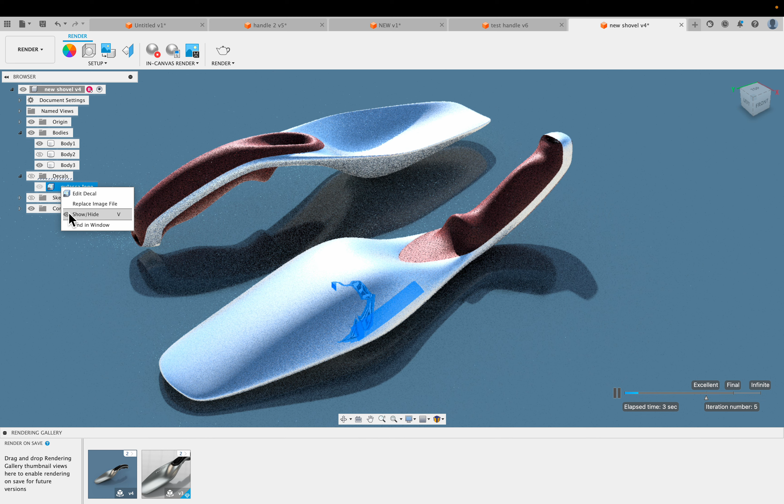And notice also, this is something that's super weird. Do you see that? That's the decal that I placed on there, and I turned off decals and it's still showing up. I don't have an answer for you there. So let's see if I just delete that whole decal, if that will fix it. Oh, yay, okay.

Now the environment doesn't look as good. Not sure what the difference is here, but this is kind of nice because it shows you the handle underneath and the handle on top. But let's go one more time, and I'll try the field instead.

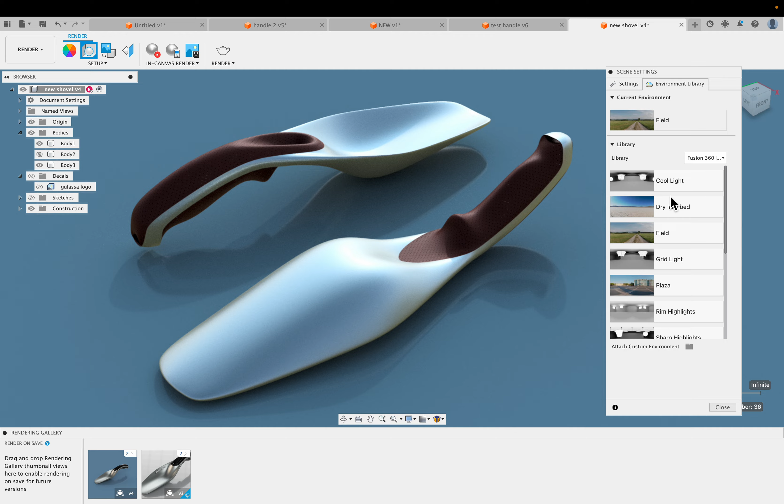Let's go to my settings. And this might make a good turntable as well. Actually, I'm going to do this one in the... still don't like this, so I'm going to go back to the indoor warm, because in this color background, it looks a little bit more like a studio shot anyway.

And this one's got a lot of extra room on both sides. If I close this, it'll give me a little more room. I'll end up cropping this in the end to get rid of that extra space, but sometimes it's nice to have the option to crop, as opposed to being stuck with something too short or too long. So I could put some titles over here, and put some text down in there.

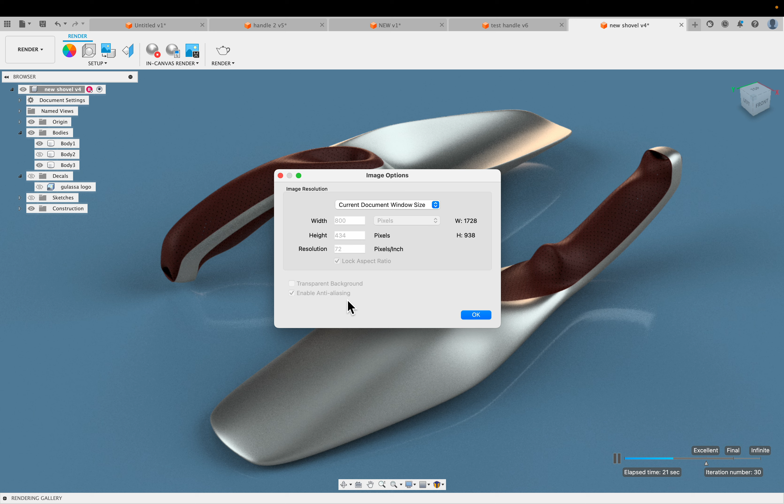As soon as this finishes, I'll save this as, again, rename it. Ta-da. Okay, anyway, I'm going to stop there. Thank you for your time.

Oh, actually, no, I'm not going to stop here. I lied, I wanted to show you the last thing: saving this file as a USDZ is really easy. Just go up to, first of all, let's save it as is. This material may not show up really well in the USDZ, so I might be better off to change it, but, oops, I didn't mean to do that. I want to export, and then in the type, choose this last option, USD or .USDZ.

That is the augmented reality format. I'm going to throw it into my folder, and then just email that to yourself if you're on an iPhone. Why is this not exporting? There it goes. It will open up in the augmented reality viewer, which is super cool. You can also email it to anybody, and if they have one, they can open it up. Sometimes I'll throw it into my iCloud or Drive or whatever so I can access it.